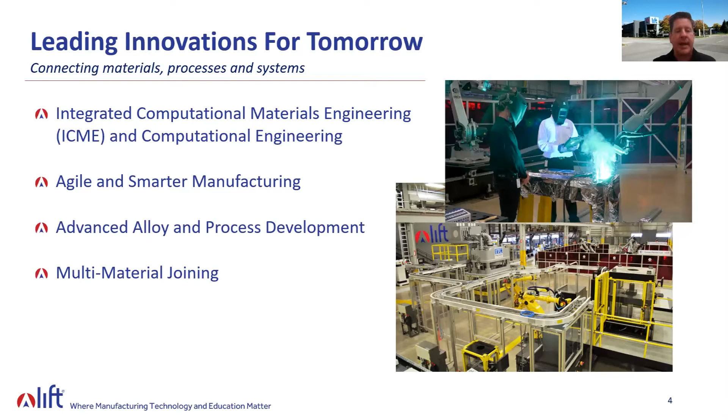So materials and processes, I know we're going to hear about that today from TWI and Element Six. So how do we do this? We do this with two programs at LIFT, our technology program, Leading Innovations for Tomorrow, and our talent program, Learning Innovations for Tomorrow. We know that the talent gap that we see around in the US is not just a US problem, we know the talent gap exists in advanced manufacturing around the world as well. So I'll touch a little bit on our technology program, Leading Innovations for Tomorrow. You see on your screen here the four pillars of technology that we focus on, all the way from integrated computational materials engineering to agile and smarter manufacturing, like we spoke about, advanced alloy and process development, and multi-material joining.

I won't quiz you on what you see on your screen, but a little bit deeper dive into those pillar areas, and you see why it's important to have an organization such as TWI to be a part of LIFT as we're talking about new innovations in welding. That is certainly high on our priority list as we innovate across these pillar areas.

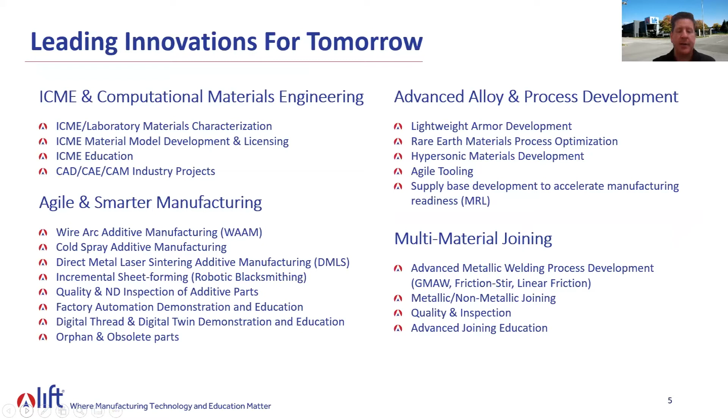On the talent side of the equation, again, it's all about innovation there as well. Starts with our Ignite Mastering Manufacturing curriculum, a curriculum that we developed with funding from the Department of Defense, mostly for high school students, which is taught at our learning lab. Pre-pandemic, we would have 120 or so students participating in this at our facility in our learning lab.

Participating in this curriculum, learning about material science, learning about introductions to advanced manufacturing.

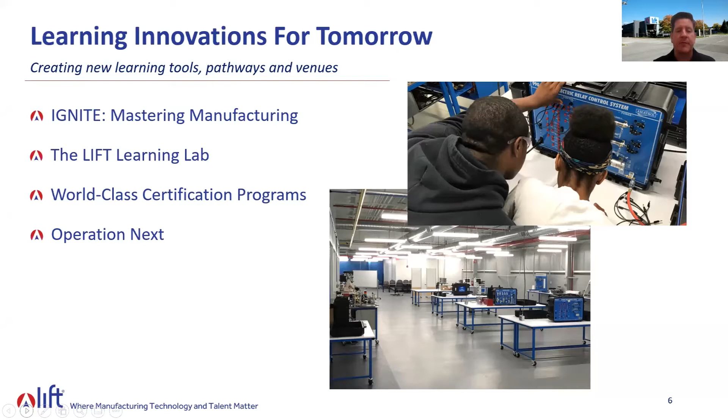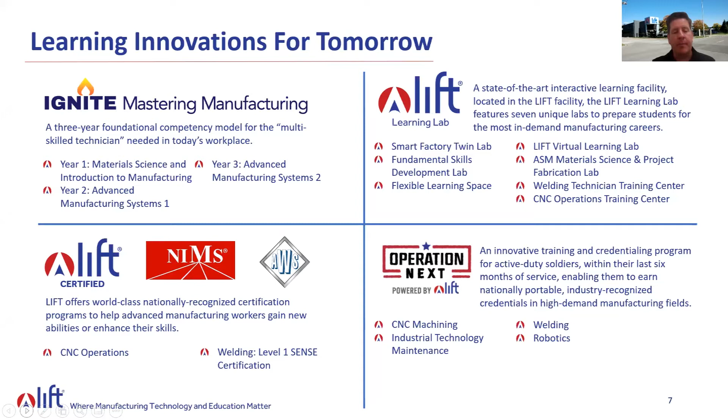We also offer world-class certification programs for jobs that are available today, both through LIFT and through our program called Operation Next. Operation Next was launched to help our separating men and women from the military, as they leave military service, earn credentials in advanced manufacturing jobs. It was launched as a pilot at Fort Campbell, Kentucky, and has been expanded to the National Guard in Michigan and Florida. We're also expanding it to small and medium-sized manufacturers here in the country to help them get off the mat from the pandemic, encouraging folks to receive upskill training or begin a career in advanced manufacturing.

I mentioned we are a public-private partnership. We are a nonprofit organization, and we're also a membership-based organization. We're proud to have TWI and Element Six both as LIFT members.

So what do you gain from being a member of LIFT? Everything you see on the screen here: being a trusted advisor, we're not here to sell you a specific good or product, we want to give you the best advice as it relates to becoming a smarter manufacturer. We're a technology accelerator, bringing technology from concept to the marketplace as quickly as possible. We're also a technology showcase, so next time you're in Detroit, Michigan, please come visit our facility when it's safe to do so. We want to show you the art of the possible, but that's also where we do our work, with technicians in our high bay conducting research and development each day.

We are a connector and convener, and today we are taking that around the world.

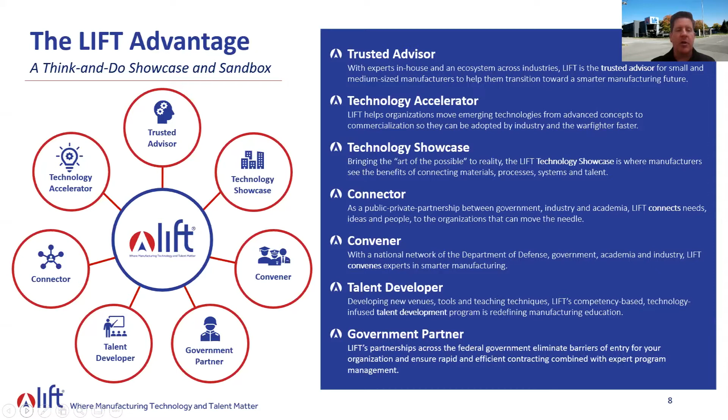So you may wonder, all this discussion about the Department of Defense and American manufacturing, why are we talking to TWI and why are we talking across the pond about manufacturing? We know there are smart folks around the world we can partner with to collaborate on research and development projects. There are unique facilities and equipment on both sides of the pond that we can share and partner with for the benefit of the entire manufacturing ecosystem. There's a shared knowledge base on industry and technical data, specifically welding, bonding, and joining, which we're going to talk about today. We know there are opportunities to share best practices through webinars and workshops. We conducted one previous webinar with TWI last fall, and we're looking forward to this one. While we're focused on the U.S., we understand it's a global ecosystem, and we're proud to have had TWI and Element Six as members.

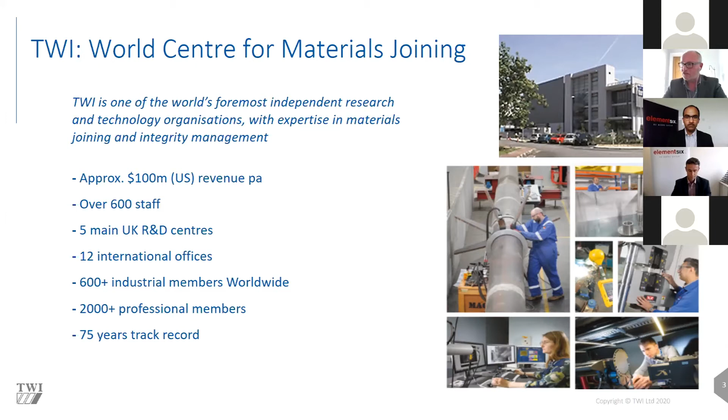We also have 12 international offices which support members with training requirements, certification, and other challenges they may have. Besides our industrial membership, we also have professional members - over 2,000 of them. And all of that has been built over 75 years, so we think we're justified in saying we are a well-established organization.

Very quickly, the 4 main groups at TWI - to use Joe's phrase, the pillars - are advanced manufacturing, materials and structural integrity, non-destructive testing, and non-metallics. The advanced manufacturing side is the group I actually work for. So that gives you an overview of the broad church that is TWI and the areas we support.

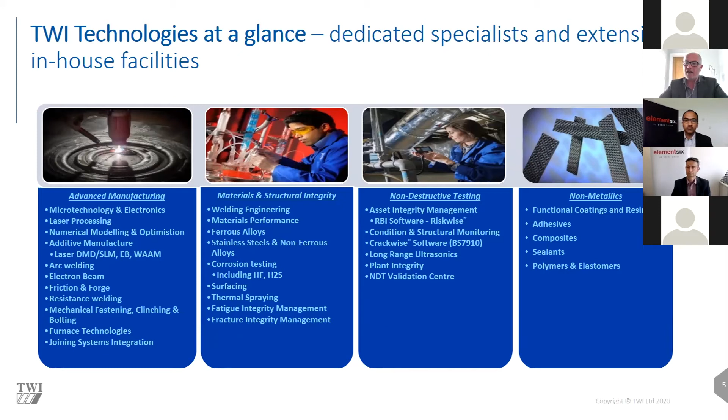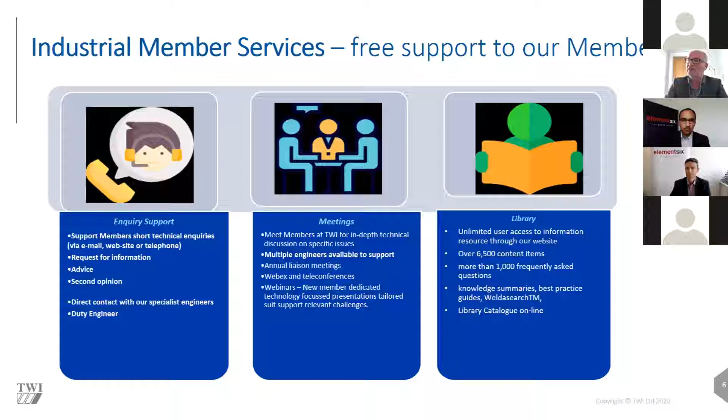We work across a broad range of sectors - I'm not going to go into them all individually. Historically, oil and gas has been a very big area for TWI, but in recent years, with the rise of the electrification agenda, we're doing more work, for instance, with automotive manufacturers supporting battery manufacture, which has plenty of joining challenges that we're pleased to help with. That gives you an idea of the variety of areas we work in and how diversified we are.

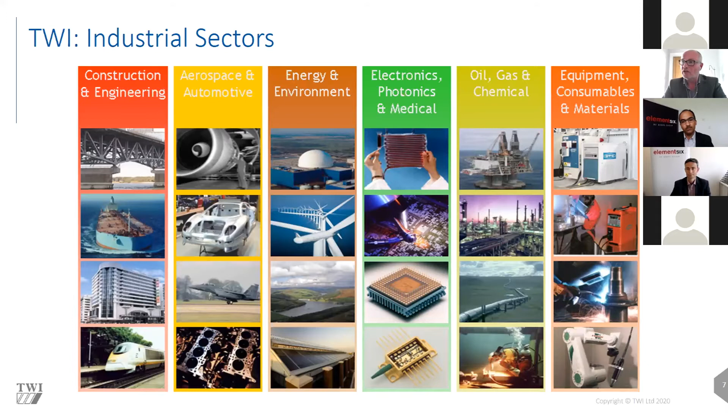A few quick facts about friction stir welding: I'm very proud to say that friction stir welding was actually invented by TWI in 1991.

The solid state bonding process has many benefits: it's repeatable, robust, reliable, and accurate. One big benefit is reduced distortion, etc.

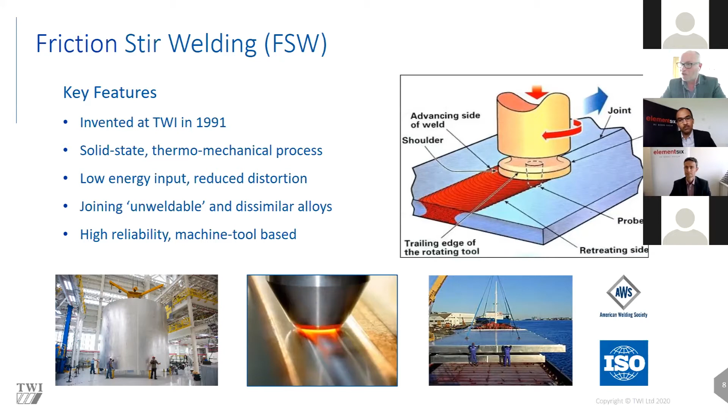Friction stir welding has been very widely used for aluminium applications. We're looking at an aerospace application on the left, and on the right-hand side, a marine or shipbuilding application.

One of the big questions we've had many times is, can you friction stir weld steel? It's been the holy grail, something Steve has been working on for a long time. We have been able to friction stir weld steel, but because it's such a challenging environment for the tool, we've had problems with tool life, consistency, and related issues. That drove us to talk to the team at Element Six to try and come up with tool materials that would give us consistency.

Element Six will talk a little about what they've done, and Steve will also tell you about that. I thought it was interesting to give you a few facts about the size of the market - we estimate the friction stir welding market is currently approximately $50 million, and is very aluminium dominated, depending on where you are in the world.

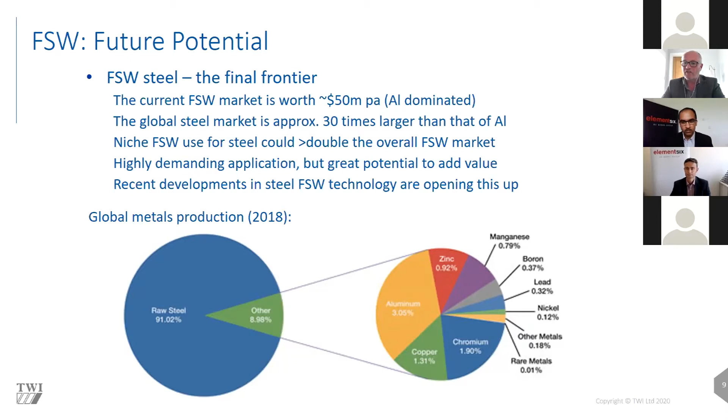Obviously, the steel market is dramatically larger than that, and I think that perhaps gives you an indication as to why we are driving this agenda - we see huge benefits with being able to friction stir weld steel. Initially it will be more niche applications that we're looking at, but we're really excited about the development we've done and the path forward.

That really underlines what I've just said, that it's been a challenging journey so far, but we really feel we are now making great headway. We are very fortunate to be joined by our friends at E6, who I'm going to hand you over to now.

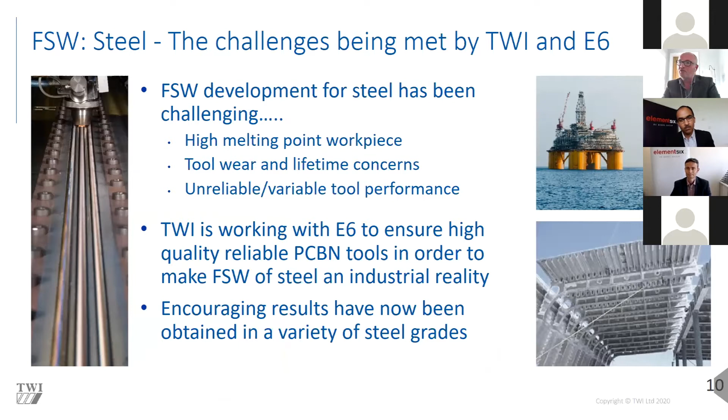Firstly, maybe to introduce Element Six, and also to talk about why we feel we're in a unique position to develop a friction stir welding for steel solution. For those who don't know us, we're a global company. We're actually part of De Beers, who are in turn part of Anglo-American, and we're proud to be part of a large company.

In terms of our locations, we've got quite a wide spread - six factories over 6 different countries, and we're also supported here where I'm based in the UK, by an innovation centre with a team of about 100 scientists. In terms of US, we have good coverage - plants in Santa Clara and Portland, a sales office in Houston, and also distributors in Canada and the US.

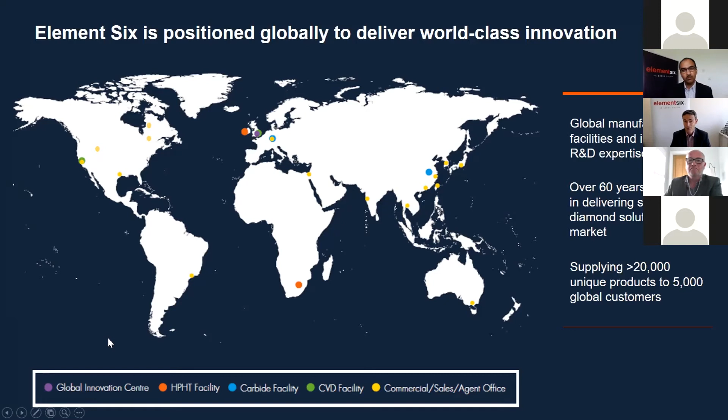We've been producing industrial diamond for over 60 years, for a wide range of industries and applications - aerospace, automotive, semiconductors, and oil and gas as well is a major market for us. In fact, we have at least 20,000 unique products over 5,000 customers globally, so quite a large spread.

Interestingly, with our high pressure, high temperature press systems, we operate at very high pressure. To give you an example, the pressure is equivalent to the Eiffel Tower standing on top of a can of Coke, so that's a lot of pressure.

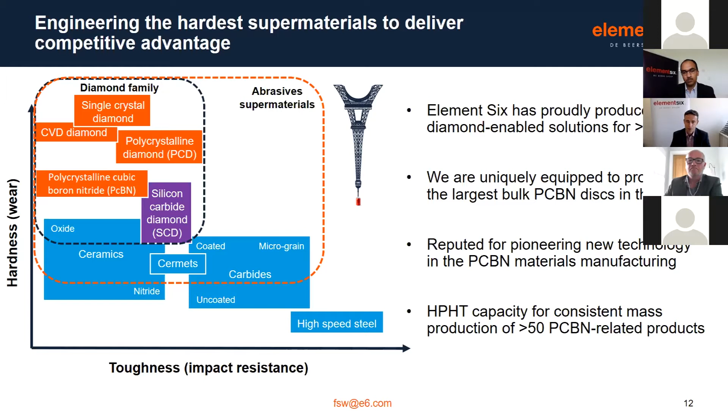We've also been producing PCBN for many years, over 40 years, and we've invested a lot in R&D and innovation. We have the largest bulk discs available in the market, and a wide range of PCBN tailored to the application - over 50 different recipes and products. This is one of the reasons we feel we're uniquely placed to develop the solution for friction stir welding. In terms of capacity, we obviously produce a lot of PCBN every year.

And so when we move from the current development stage into mass production, we're quite confident that we can scale up into large volumes.

I think one of the key questions you probably have is also, how do we make sure that the tools are consistent, hard wearing, and durable?

One of the key things is using that knowledge of PCBN. And working with TWI has also been critical, supported by our team of scientists here.

Now what we're able to do is control the end-to-end process. So for example, we control the powder preparation, the press, the processing of the material, and also the tool prep. And having the testing feedback from TWI is so important.

We're really excited by the results we've got so far. And I'd like to pass you over now to Santanu, who will explain in greater detail.

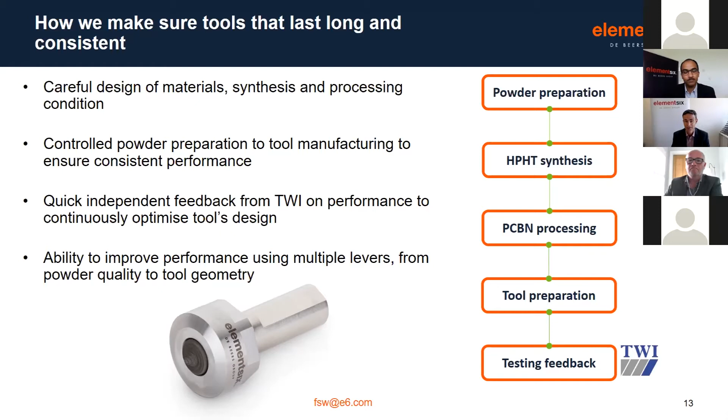Thank you, Richard, and thanks, Joe and Nick, for hosting the webinar. So Richard talked in the previous slide about the cycle of development. It took almost 2 years for us in this development process.

Before I jump into the details of what we have done and what we are talking about today, let me talk a little bit about PCBN, which is short for polycrystalline cubic boron nitride material. Cubic boron nitride is one of the hardest materials after diamond, and it's not naturally available or naturally occurring. So we have to manufacture it in a synthetic process, which is high pressure and high temperature process.

Now, for most ferrous machining and high temperature metal processing, polycrystalline cubic boron nitride is a very important material, primarily because of its high temperature properties, which include hot hardness - for example, its ability to withstand high temperature before you see any deterioration.

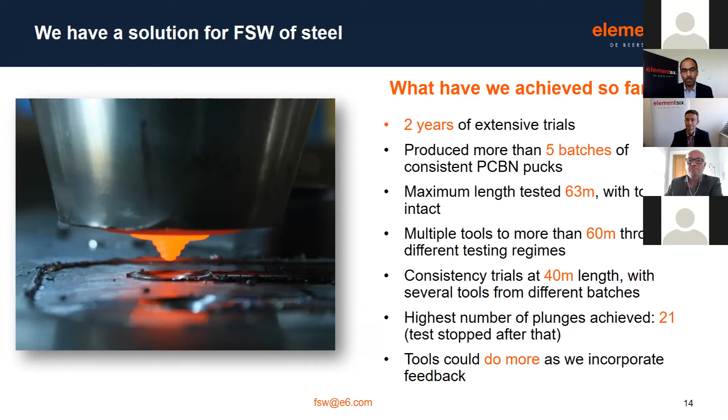So in terms of the tool, Steve will be talking on the weld assessment side, and let me talk about the tool assessment side. When we ran this consistency trial, along with the weld quality consistency, we wanted to see how the tool wear is happening.

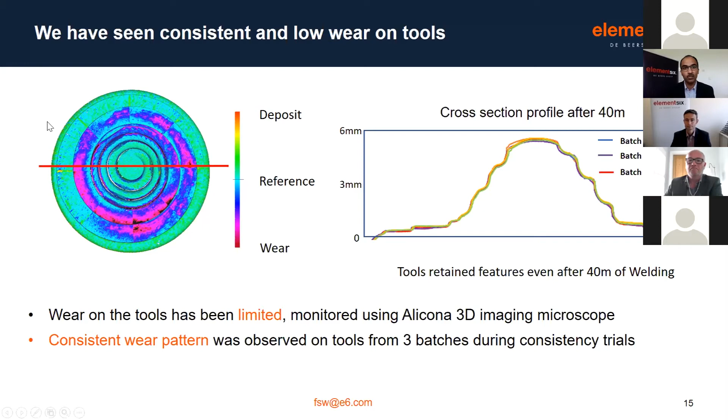Next slide, please. So we have done quite a lot with these tools. It's not only testing these tools for life or consistency, we did test them at different regimes, whether it's force control or position control, for different grades of steels, for example S355, DH36, and so on and so forth. Steve had tested them on other steels and grades as well, and stainless steel, for example, and Steve will be talking a little bit on that.

Now, we know that these tools could do more than what we have tested for. We would like to see their performance, and we are quite confident that they will be performing in your application as well. Each application has their own requirement, and the tool design etc. will rely upon what kind of application we are doing. So if you have any application in mind in which you want to try these tools, please let us know, and we'll be happy to collaborate. So I'll pass it on to Nick back now.

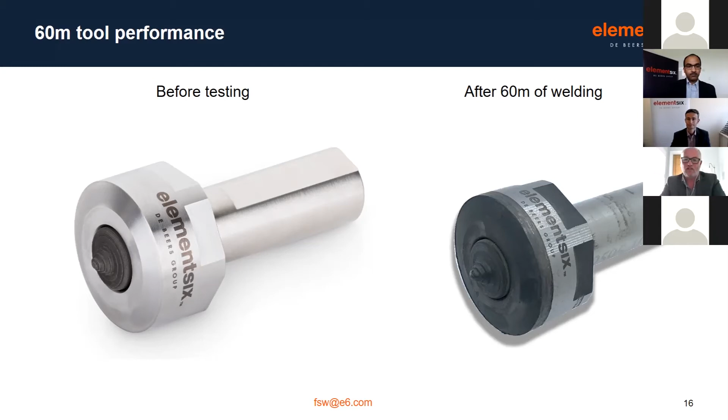Yep, thank you Santanu, thank you Richard. That's really interesting stuff, exciting stuff, and it's great to see what we're doing. I'll pass over to Steve now, who's going to tell you a little bit about what we've been doing at TWI. Okay, thank you very much.

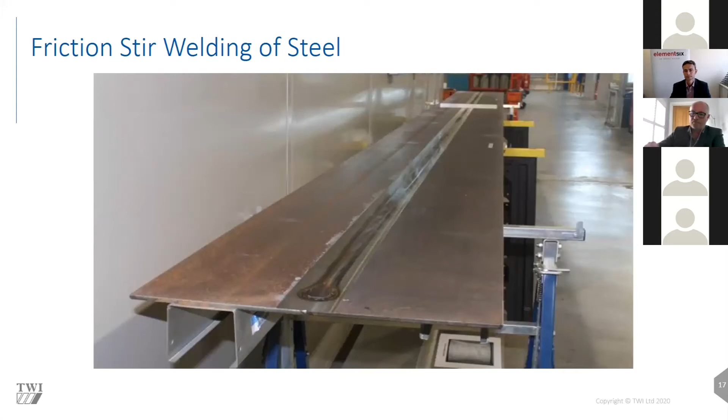What we see on the screen at the moment is just an example of a friction stir weld in 1/4 inch or 6 millimeter thick carbon steel plate, that's 6 meters long, and it just shows how little distortion we get along the length of that plate. From end to end, we saw just about 2 millimeters of distortion. So that's pretty good going.

On the next slide, we'll see some of the steel grades that have been welded. When we first started welding, we started with just simple plain carbon steel, such as AISI 1018, 1060, which are just iron and carbon. We then gradually worked our way through the alloy compositions, looking at structural steel such as S355, some of the steels used in the oil and gas industry such as the API X65 series, and shipbuilding steels such as DH36, HSLA 65.

And all the time we're gradually moving up in alloy and carbon content until such time as we reach things like D2 and O1, which many people would suggest are very difficult or even impossible to weld by conventional means. We don't find that problem with friction stir welding. We're not melting the steel at all, we're not changing the chemical composition, and so the carbon equivalent has far less influence upon the process with friction stir than other kinds of welding process.

We then did the same kind of thing with stainless steels. So we started with simple stainless steel such as 304, followed the same process, gradually moving up through the complexity of the alloys, and finally finishing with things like duplex and super duplex stainless steels, and found that we could weld them quite easily. We were then asked, can you weld some of the grades of steel that are regarded as being unweldable, such as the oxide dispersion strengthened steels? Again, because we're not melting anything, we're able to do that because we do not destroy the oxides that are in there to strengthen those steels.

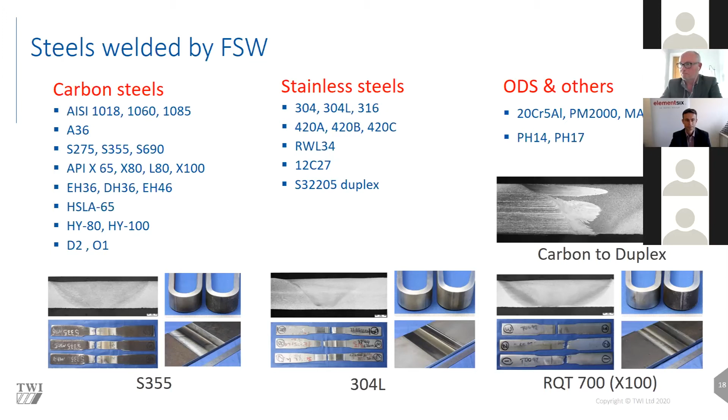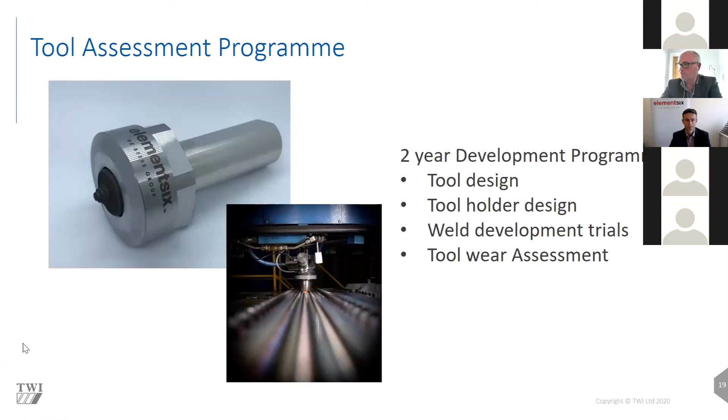So we've undertaken a tool assessment program working with Element Six, and we've assisted them with designing the tool holder and the tool design. Most importantly, we've now been undertaking both assessment of the tool wear and the weld properties themselves.

What we should have next is an explanation of the testing that we've undertaken. So we've looked at it in 3 different types of testing.

One is where we've been doing multiple short welds, typically about 2 meters long. This is perhaps typical of repair welding and pipeline welding, where the welds themselves are short and the tool is only at elevated temperature, typically around 1,000 degrees, for several minutes. The wear life of the tool is probably dominated by the plunge into the cold, hard steel, and that happens multiple times per tool.

The second testing regimen we've been looking at is doing multiple 5-meter long welds, which are probably typical of many kinds of general engineering and modular construction. This requires fewer plunges of the tool into the cold steel, but it does see much longer times at elevated temperature, typically 20 to 25 minutes, soaking there at over 1,000 degrees.

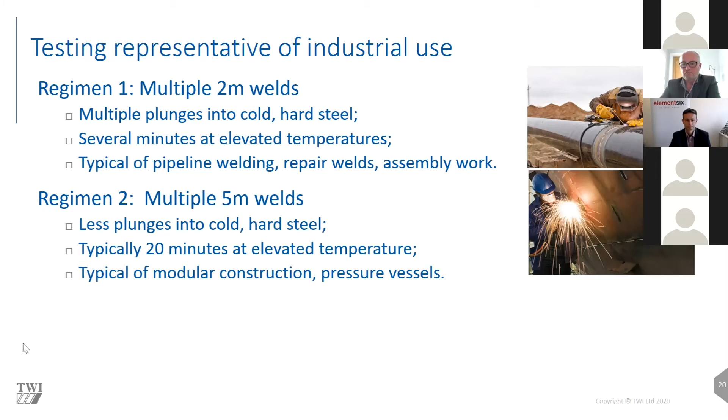And then the final testing regimen we've been looking at is making just a few welds per tool, but these being much longer, typically 20 meters long, typical of something like welding the seam of a pipe or making a stiffened panel for a ship. Under those circumstances, the tool itself may be sat baking at temperature for well over an hour.

So that gives 3 very different lifetimes that the tool may see, and it was essential that the tool could actually survive all of those if it was to be industrially useful.

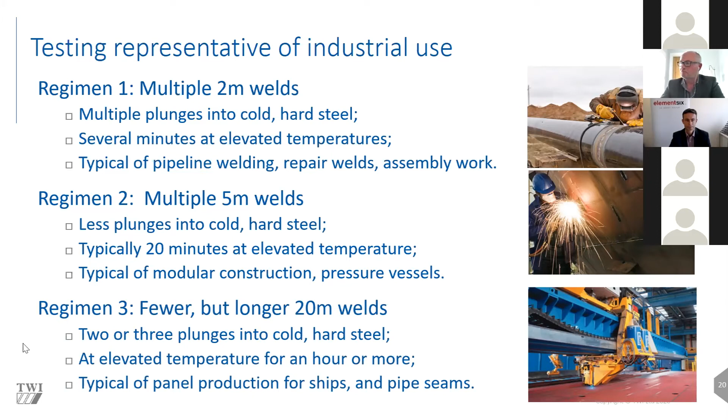To look at the tool consistency testing, we chose one of those cycles, and we decided to look at the 6mm tools that have been developed. We took 6 tools from 3 different production batches and tested them welding in S355 steel, which is a standard carbon steel widely used.

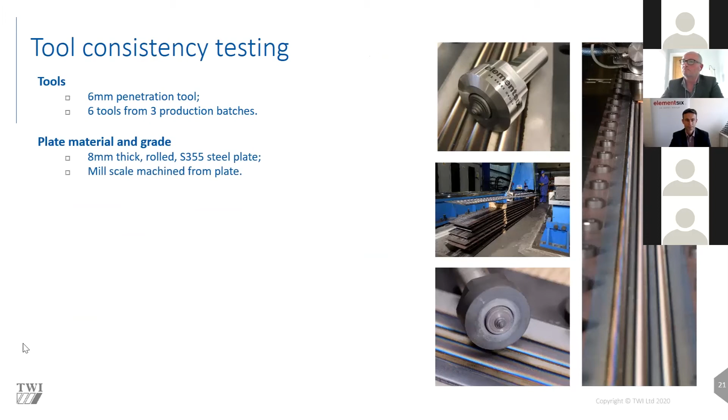We machined the mill scale from the surface of the plate to give an identical testing condition for every tool. Then we made the welds in position control, making multiple 5-meter long bead-on-plate welds. We were targeting 8 lengths per tool to give a total weld per tool of 40 meters.

For every weld made, we recorded the forces, the torques, and the energy input. We recorded the tool dimensions before and after each weld, photographed the tool, and did a laser scan of it every 20 meters to allow the wear to be assessed.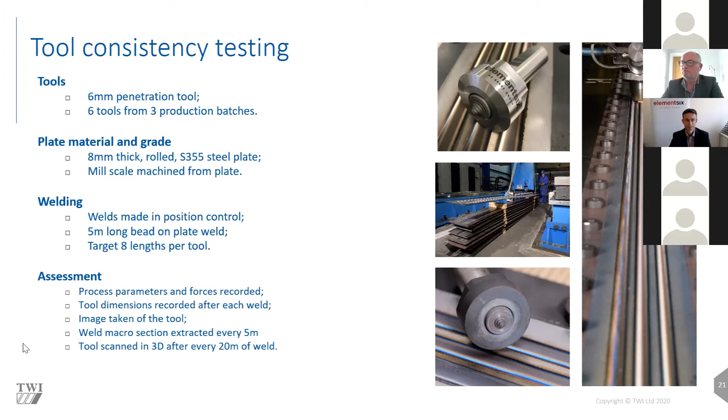Next slide, please. So if Nick runs this video for us, what we'll see is a typical friction stir weld in steel. Initially, the cold tool embeds into the steel, generates heat, and starts to traverse along the steel plate. As you'll see here, we are making multiple welds in the steel plate, effectively trying to wear out the tool.

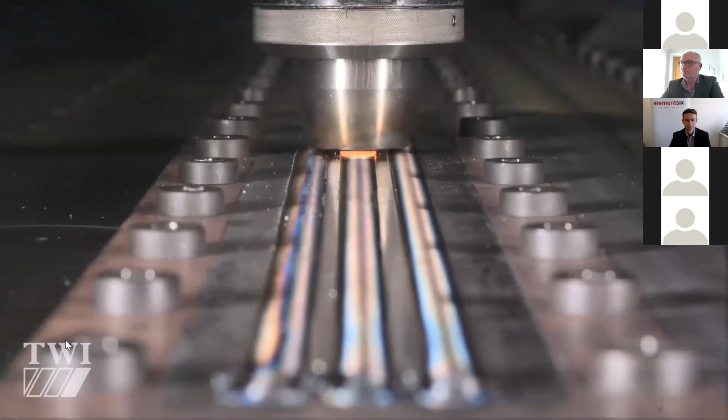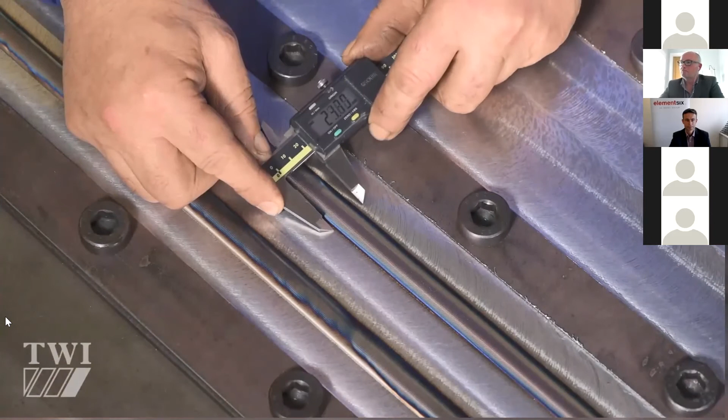We're doing multiple welds side by side. We're seeing very little distortion. As you can see, the friction stir welding process has no ultraviolet, no sparks, no fumes. It gives a very nice, consistent weld surface.

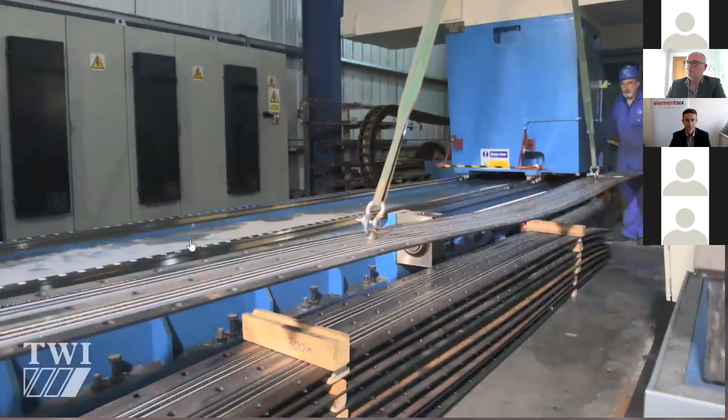We carried out that process on tool after tool after tool, building up a huge amount of knowledge as to how these tools would perform over well over 300 meters of welding.

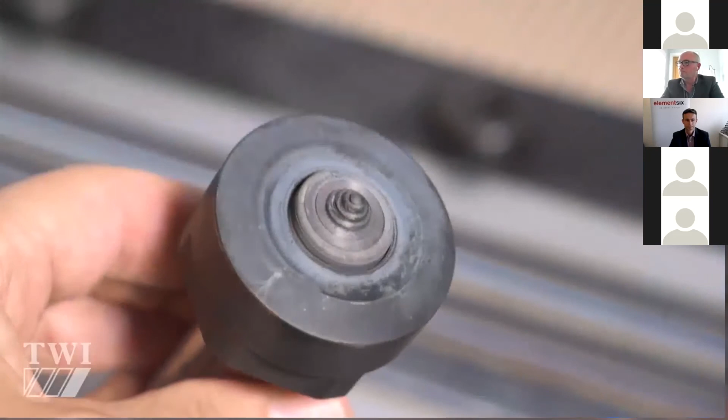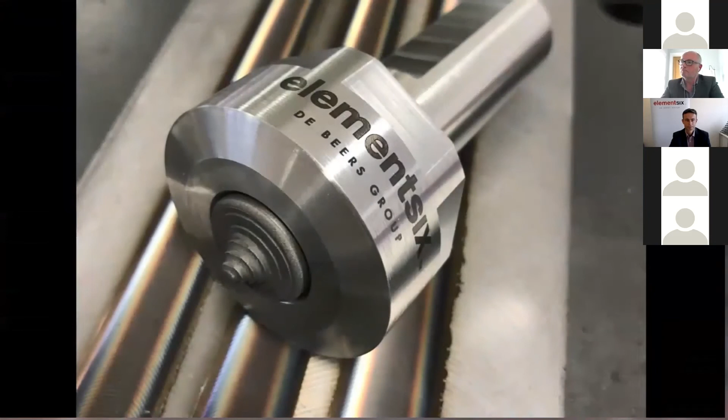When we have a look at the tools before and after welding, we've seen that when we were testing them to the 40-meter mark, we saw very, very little wear, and the tools were still giving very consistent performance and were capable of producing very good welds, even beyond 40 meters of welding.

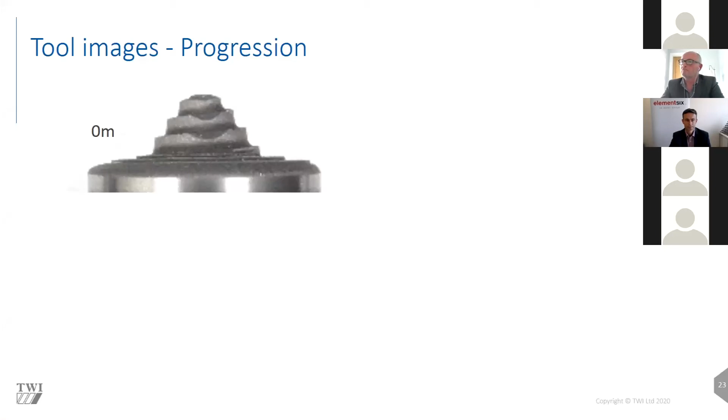The next slide, if Nick builds it up, will show us what the tools look like during the different stages of welding. Between 0 and 40 meters of welding, the amount of wear that accumulated on those tools was negligible, and so the tools were still capable of giving a good, consistent weld.

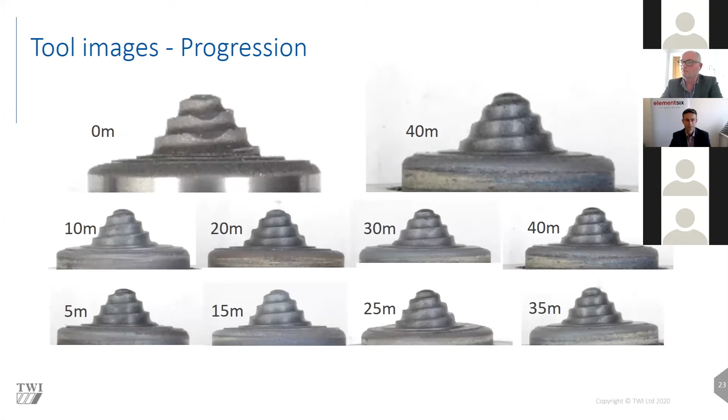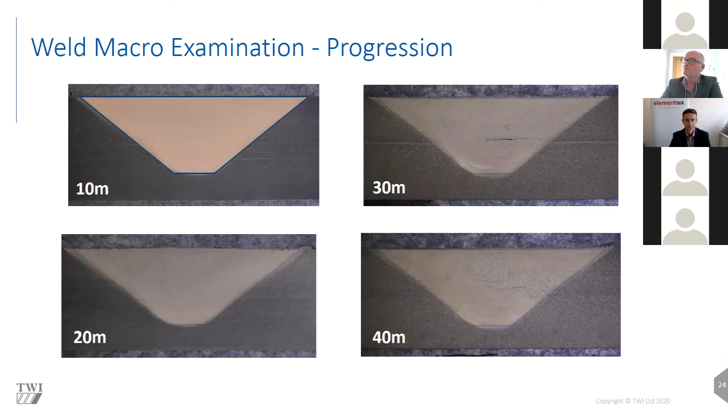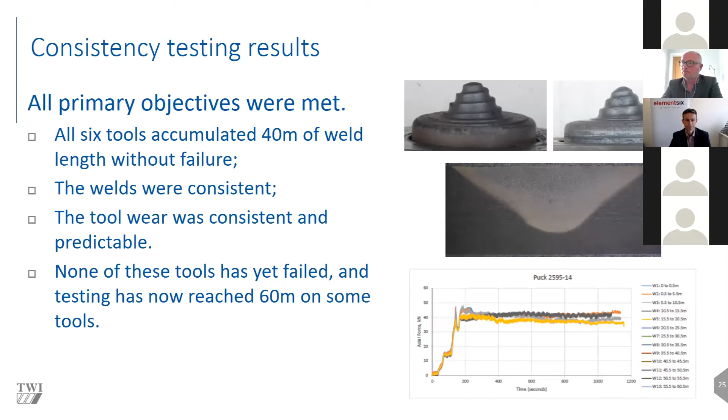Next slide, please. So as Santanu's already pointed out, what we found was that the tools were very consistent, both in terms of their wear properties and in terms of the forces and torques needed to make those welds. They were predictable. We've since taken those tools on further, and we've now reached 60 meters of welding on those tools, and they are still producing good welds.

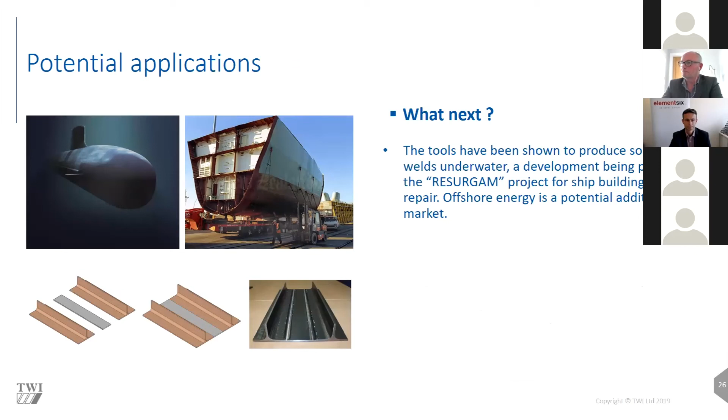In terms of potential applications, we've been looking at maritime and shipbuilding. The tools work perfectly well underwater, and we can make a weld underwater with no real problems. The very low distortion from the tools is useful for modular construction, giving a good chance that parts will fit together when brought together. We've also looked at alternate ways of manufacturing stiffened panels by welding together rolled T-sections and spacing them apart with plates, reducing the number of welds made in a structure.

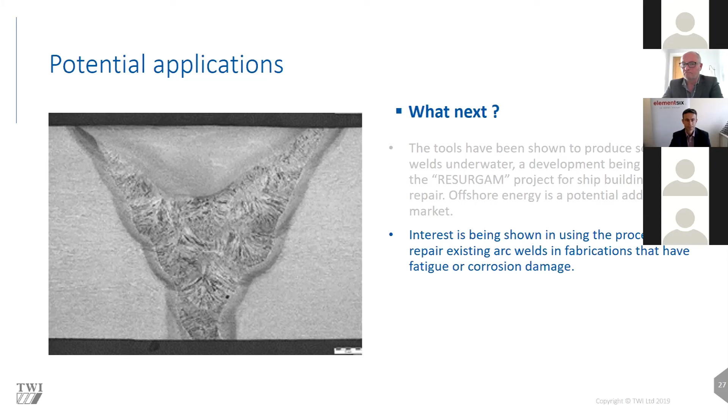A second area of interest is using the tools to weld through a pre-existing arc weld. In this image, the parent metal, 20 millimeters thick, was initially welded using an arc process taking 38 passes. The arc welded region has a large columnar grain and large heat affected zone, with very different properties from the parent material. We then ran a friction stir welding tool through the cap of that weld, returning the large columnar grain structure back to a fine-grained wrought structure, similar to the parent material. So it's not surprising we're seeing the friction stir weld having very good properties, at least as good as the parent material. That's been looked at as a technique for repairing welds.

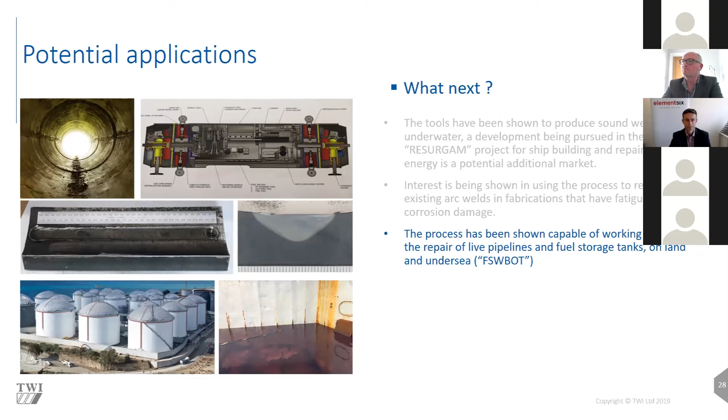As well as welding underwater, we've shown the process works under oil. We've been working with one partner to develop a system using a pipeline inspection gauge, or PIG, which can travel down a live oil pipeline as oil is flowing, detecting defects and welding repair patches over those defects. That's generated a lot of interest in the ability to weld things like fuel tanks without needing to drain and purge them. We've also been able to weld dissimilar materials, such as steel to corrosion resistant alloys and other exotic alloys used in nuclear industries, which is creating a lot of interest in potential applications.

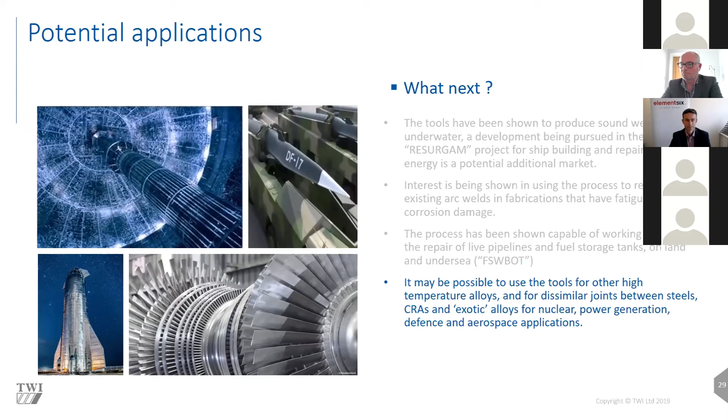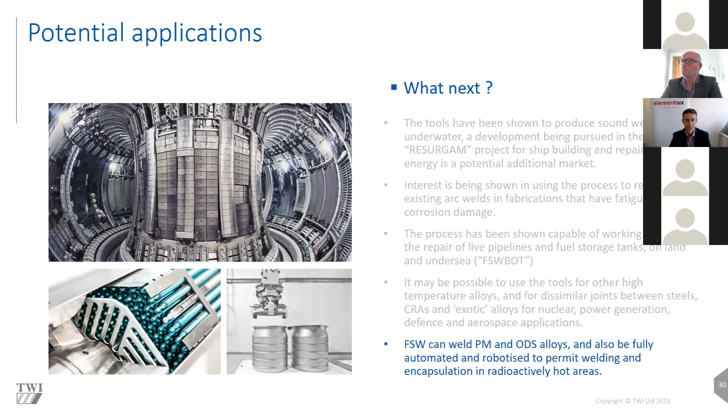Finally, on applications, as well as general engineering uses, because we can weld grades of steel and other alloys not previously weldable, such as oxide dispersion strengthened alloys, and the process is fully automated, you could deploy it in an area where you wouldn't want to send a human welder. There's been interest in welding, for example, nuclear fuel capsules which already contain radioactive waste, because the process can be done automatically and remotely.

Thank you, Steve. Very good presentation, very interesting to see the work going on and how we're moving forward. I hope that gives the webinar attendees some food for thought on ideas and applications we can look at. We thought it might be useful to give a bit of an overview, a roadmap as to how we could potentially work moving forward with hopefully many inquiries.

What we see first, the first pillar on the left-hand side, is effectively an inquiry that comes in, which could come directly into the Lyft centre, or to TWI or Element Six. At that stage, that's our 'can it be done' stage, where typically TWI would be involved in looking at the application, working with Element Six to see whether we think that is feasible.

The next stage would be the validation phase, effectively looking at doing some welds, working out the WPS, looking at economics, prototypes, and even moving into the next phase of industrialization - what are the equipment costs.

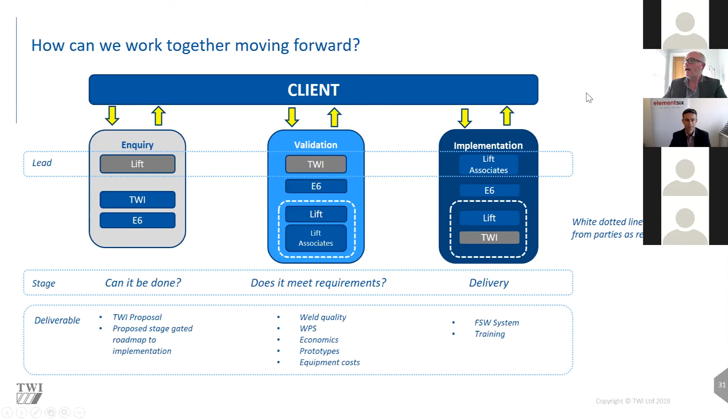So that concludes the presentations from TWI and Element 6. I'm going to stop the share now, and I think Joe will be analysing the questions that we've had.